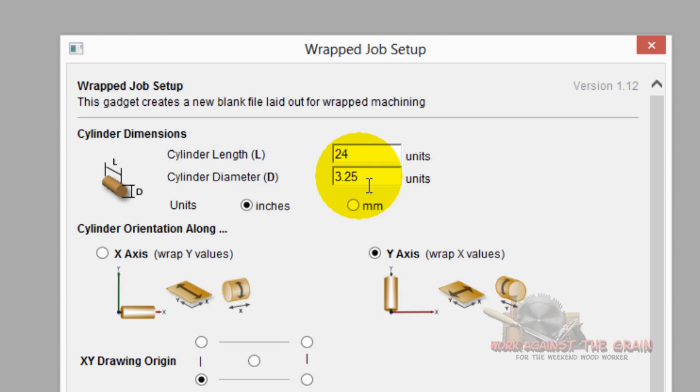Wrapped Job Setup. We've got a 24-inch long cylinder, 3¼ inch diameter. We're going to wrap our X values around our Y axis. Our Z0 is going to be in the center of the cylinder. We're going to use a simple cylindrical wrap and click OK.

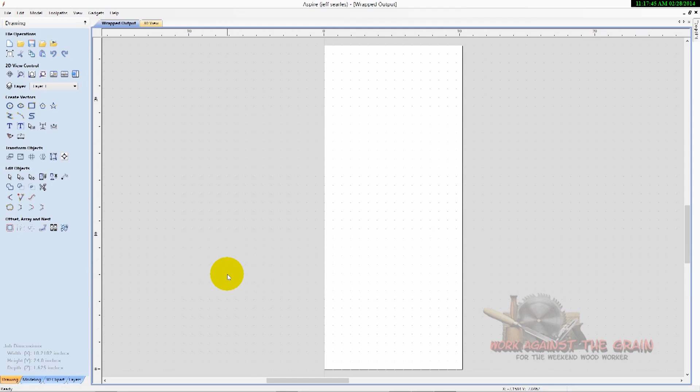Now, this represents the stock. Remember, when we're utilizing the wrapping, you're picturing this edge wraps around to the other edge. If you were to take a tape measure and wrap it around your cylinder, it would be 10.2102 inches. We need to know that measurement in order to know how long our polylines need to be to create the vectors that the profile bits will cut along.

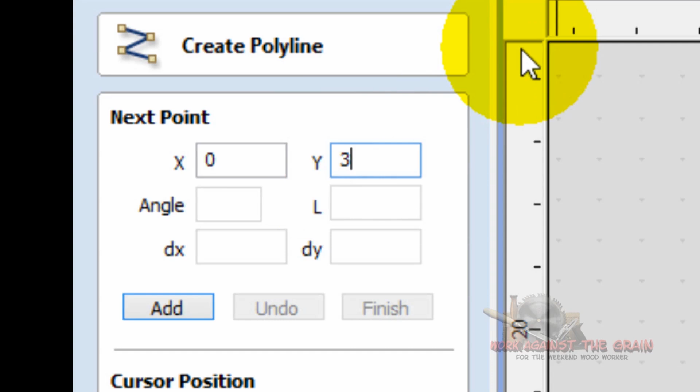So we want to come up here to draw a polyline. We want to start at X0, Y3, click Add, and you can see here that adds a point there on the X0, on the very edge there. Then we're going to put it at a 0 angle because we want it to go straight across.

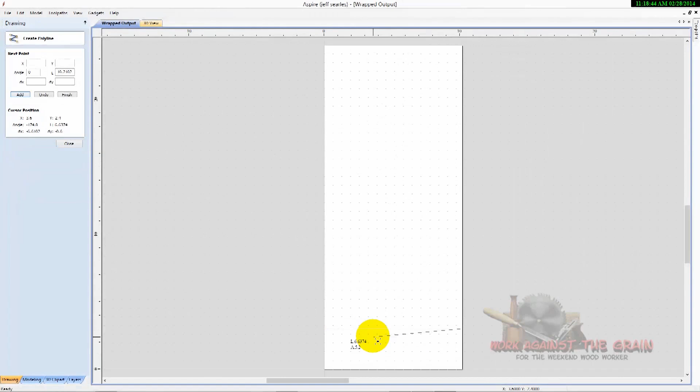This is where we want to put that measurement we remembered. In our case, it's 10.2102 inches, and click Add. You can see there that now has a polyline that runs the length of our stock, which in our case is the circumference around our cylinder.

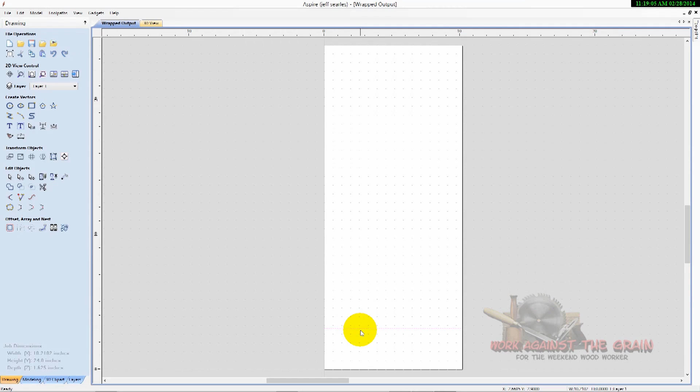And then we're going to click Close. We have now created a vector, a 2D vector, that we can have the profile bits cut along. So let's go over to our toolpath tab now. We have our vector selected here, and we want to come up here to the profile toolpath, select it.

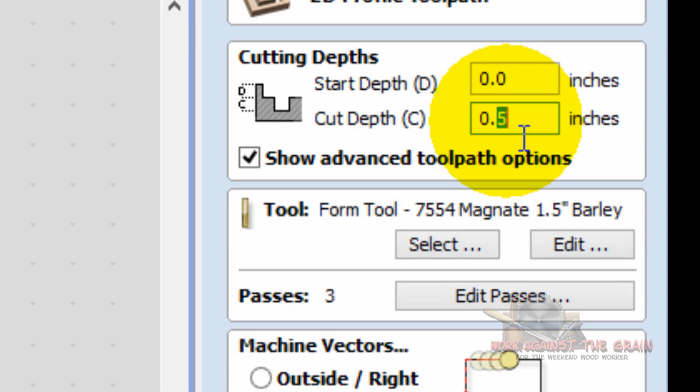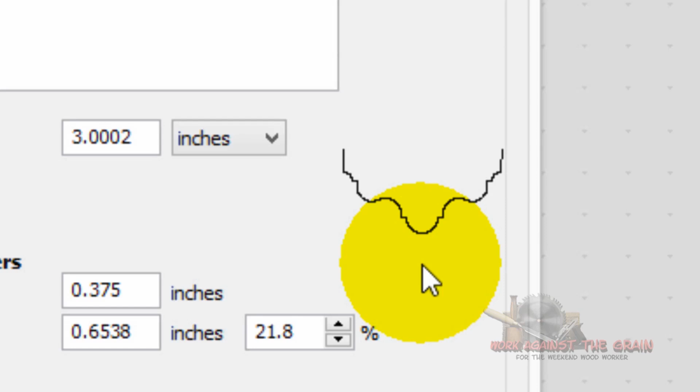In our particular case for the profile bit, you're going to have to play with this a little bit to get the desired result, but in our case we're going to cut 1/2 inch, and we want to use our 3983 Magnate Classic Plunge, and that's what that bit looks like. Again, you can go to Vectric, and there's some great videos on how you can add a profile bit to your tool database. So I've added this one, and we're going to select OK.

It's going to make 2 passes. We're going to cut on the vector line. We have no need for tabs, leads, ramps, order, or corners. We'll come down here and call this 3983 Classic Plunge, and calculate. As you can see here, we've created a tool path now on our stock,

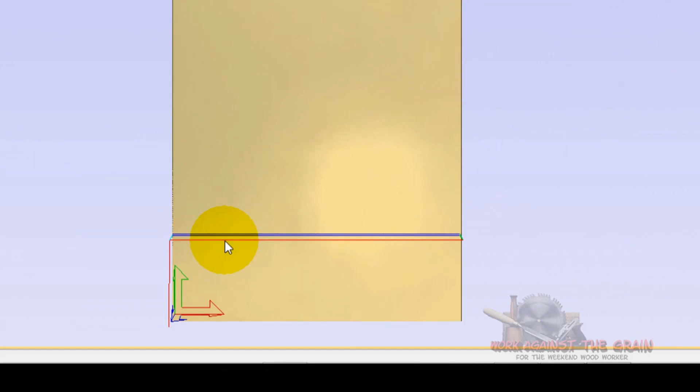and we can come up here and preview that tool path. That gives you what that tool path would look like in some flat stock.

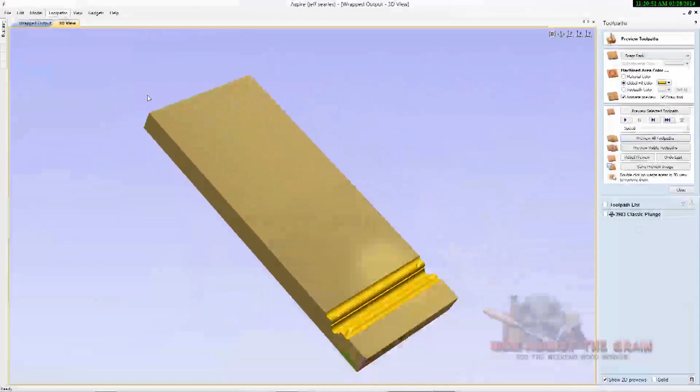But what we want to do is come over here to tool paths, tool path drawing, and we want to wrap our X values around our Y axis. So you see there's our cylinder, and there is our profile bit that has created a nice bead and cove look utilizing a real simple Vectric 2D tool path and a profile bit.

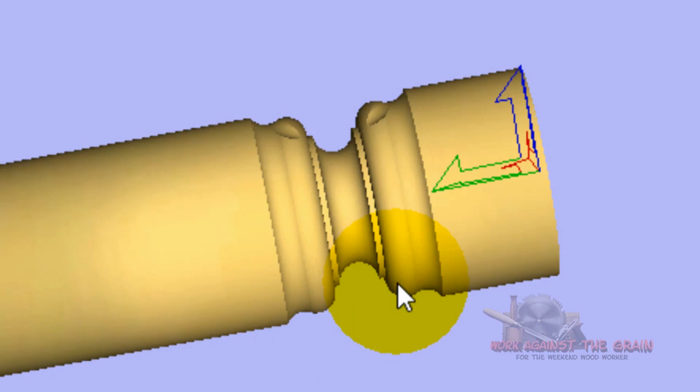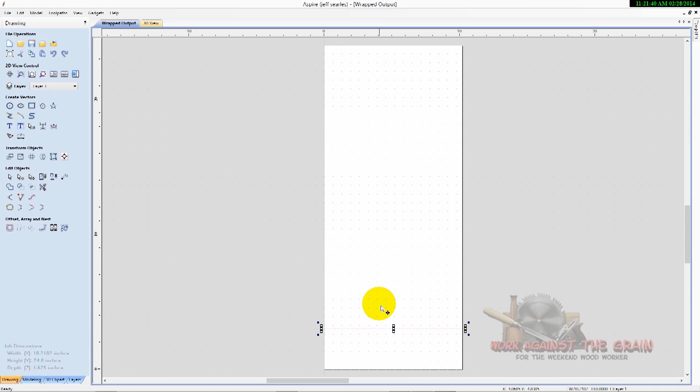So what we're going to do is, in our drawing tab, we're going to create some more of these vectors and some more tool paths. They'll all be done exactly how we did that one. We're going to take some different bits and show you what those different profiles can look like utilizing the vectors you create in Vectric.

Okay, so we've got the vectors that we created in Vectric loaded into our CNC machine. Now we are going to take our profile bits and cut on the vector line. I'm going to take a few of the bits and show you the different profiles and the different looks that you can get with the different profiles and a real simple 2D toolpath, vector toolpath out of Vectric Aspire or VCarve Pro. Now this first one is what's called the classic plunge bit, and here we go.

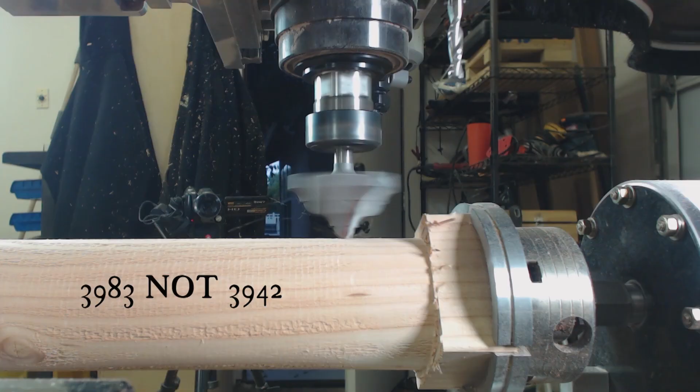3983 Magnate Classic Plunge. I'm just using a 4x4 from Home Depot just to show you the tool path and the profile bit, okay? No great wood species here.

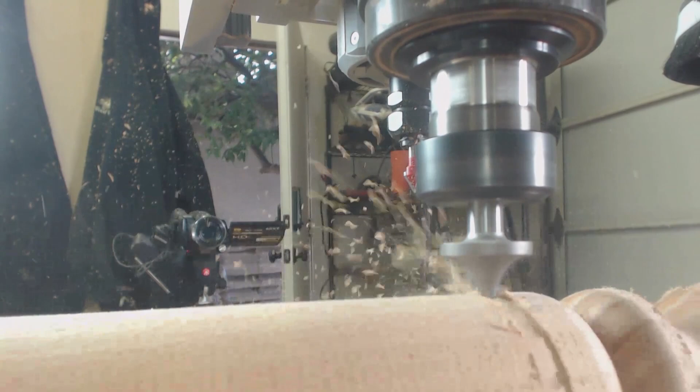I always take it to G53 Z0 for the first one, and then we just raise it to safe Z2. Thanks to Mick Martin for that tip, because that saves some time as well.

Now you could stop there if you like that bead. I'm going to go ahead and go the same depth as I did the first one. And as you can see there, that gives you a really nice looking donut-like bead, if you will, that really looks good.

So let's get a close-up there. Whoops. And look, I'm no designer. I just want to show you what you can do with the various profiles.

Here I've shown you 3 or 4 different profiles and some techniques that, utilizing Vectric, the wrapping gadget, the rounding tool paths, and some profile bits from Amana, Magnate, the router bit company of your choice, you can create some pretty neat profiles and some pretty neat looks on the 4th axis of your CNC.